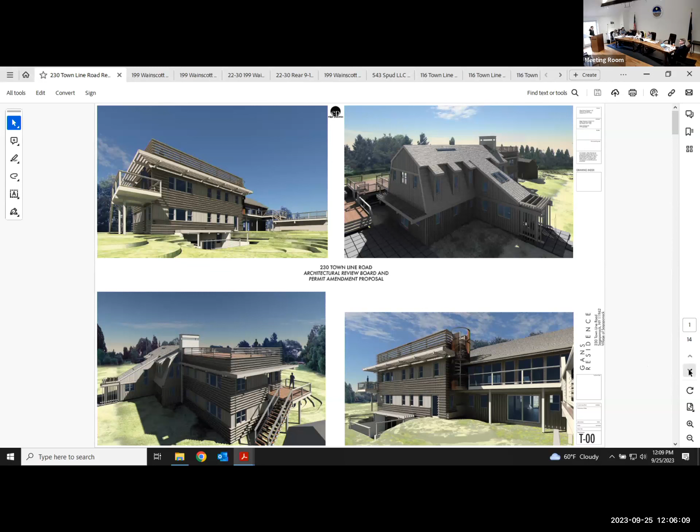So I recommended that we also demolish that roof stair that's very visible on the south side of the house and replace it with a much smaller spiral stair that's clad in wood, mahogany slats to match the existing decks.

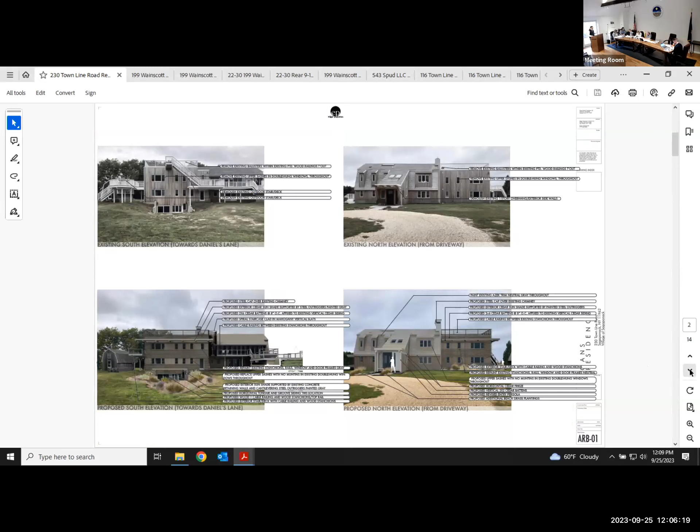And the proposal involves replacing all the upper window sashes of the installed double hung windows with ones that don't have muntins, to lend a more modern look to go with the overall kind of aesthetic. And we've already been talking about the railings.

Right now, there's all these wood balusters everywhere, and so we're proposing to take all those out and replace that with cable rail between the existing stanchions, posts.

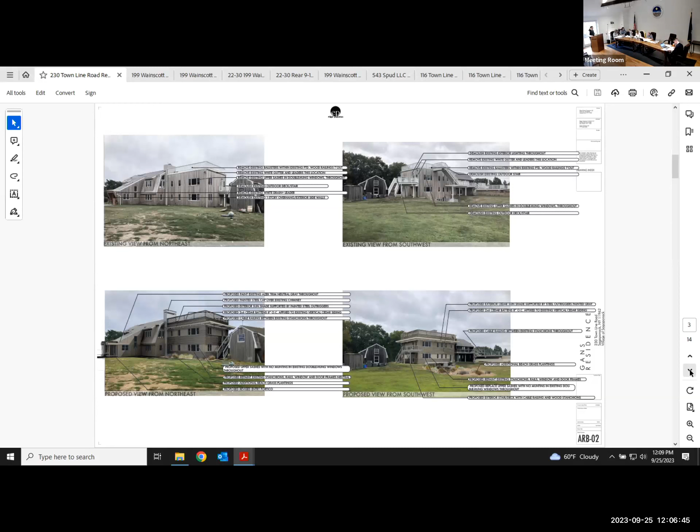The other aspect of it is to repaint all the existing trim to something more neutral, a gray color. Everything is white currently. We're trying to match the weathered cedar appearance to give it a more unified aesthetic.

And then the last piece of the proposal is to rethink the front entryway and make it a little more fitting to the house by taking out the existing overhang, replacing the slatted entry pergola, and putting in a larger pivot door with a glass side light and a built-in bench.

Overhanging slatted frame, you're referring to what we see in the bottom right-hand corner, is that correct? The front entryway, yes, that rendering is ARB-05, the bottom right image.

ARB-01, right? I'm sorry. ARB-01, well, yes, that's a similar view. I'm not sure we have ARB-05 in this packet. Oh, you don't have 05? No, I'm sorry.

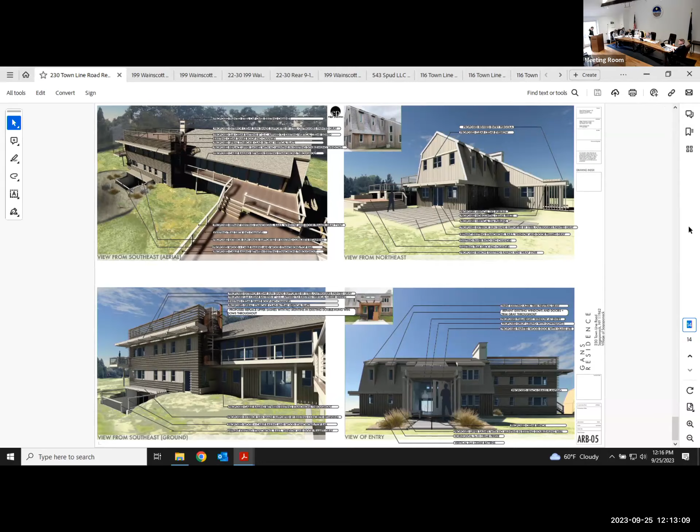Is there any landscaping planned other than what we see? The idea was, in front of the basement egress, to plant beach grasses as seen in the renderings, as well as on the other side of the addition at the base. To see that, look at ARB-01, the lower left-hand corner, and the lower right-hand corner for the plantings in the front as well.

Are there any plans for the driveway? The driveway as existing will remain, if that's acceptable - it's a circular drive. How much do we have to say about driveways? Nothing really.

Did you have anything else to comment upon? Not necessarily. I've taken both of your comments about the railing at the top and then the gray paint appearing too light in the renderings. But that's all I had.

And the plans for the fireplace, what it was to what you're doing now? There's an existing chimney that is currently stuccoed and painted, and we would paint that to match the other paint, as well as put a steel cap on it. It doesn't currently have a cap. And that would all be painted the same.

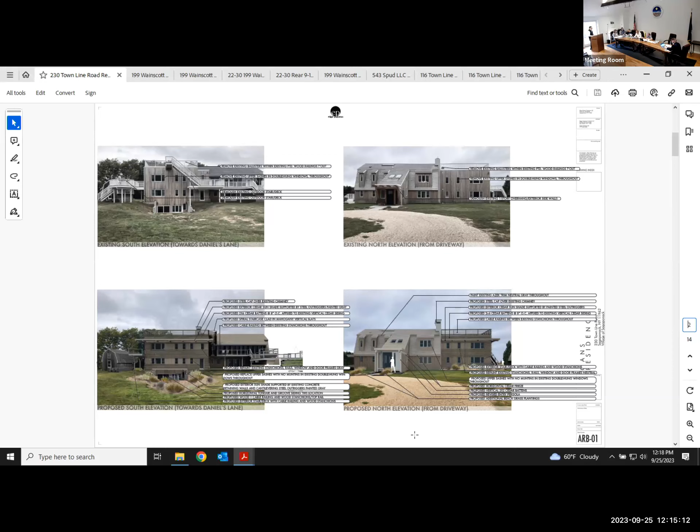Lighting, outdoor lighting for the house - I see 2 lights on the whole house, but I don't see any proposed lighting on the entryway. On ARB-03, there's a light fixture in the lower right-hand corner that we're proposing, just very small, minimal LED downlighting for entryways to code. Nothing as large and dark as the ones that are attached right now.

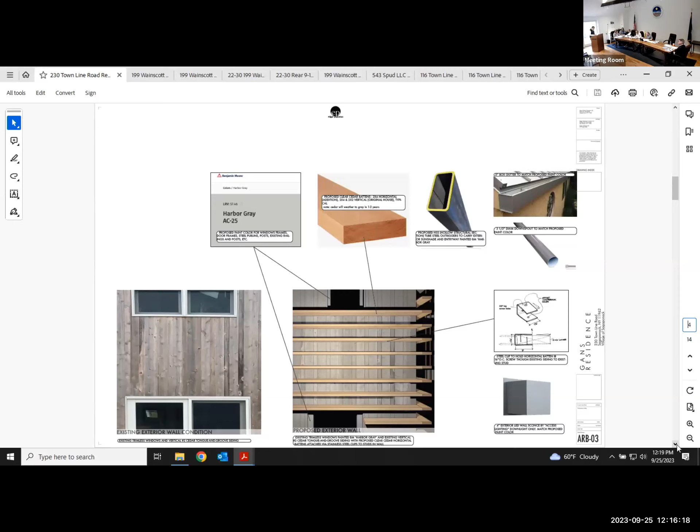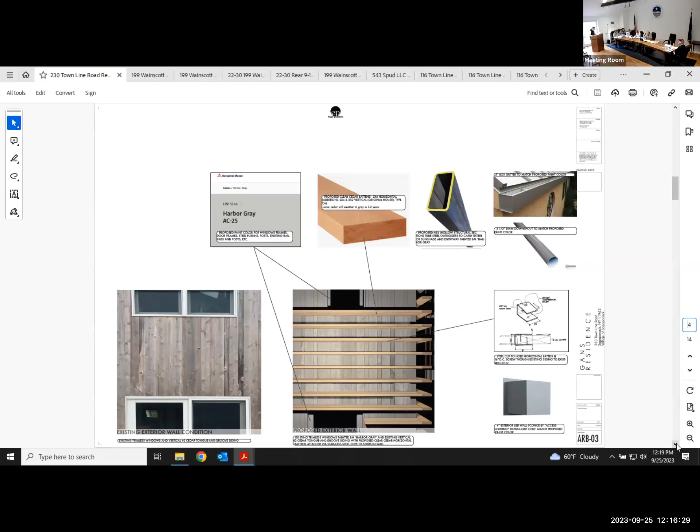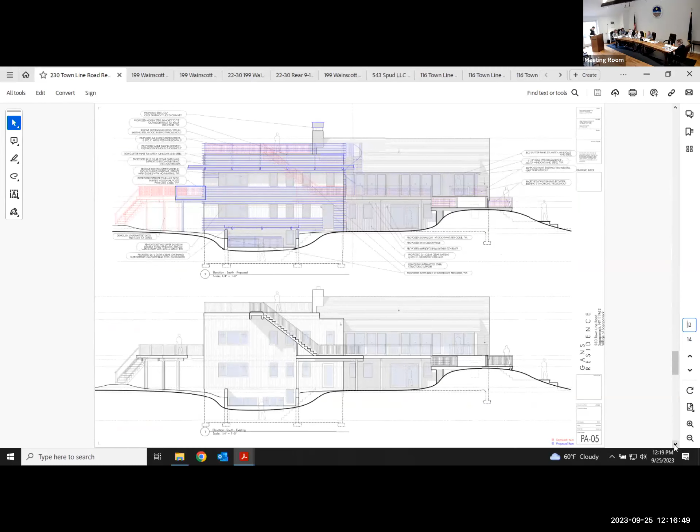Also PA06, we propose to remove the existing lighting that's there right now. The difference in height on these and PA06 is because - the proposed lighting, there's one right over the door and then on the top right, there's one way up high.

Oh yeah, well that's what's there right now. I think the owner placed those there as sort of area lights. I'm not really sure what the purpose of those are. You see in the existing drawing, they're in both those locations. So kind of put them back where they were. But if we don't need those extra ones on the corners of the building, maybe we can take those out.

How much lighting do you need out there? Is it lighting a stairway or something? I think they're just meant to light the ground for occasional use. Okay, I don't know if we want to light anything, we don't have to light for safety. Yes, so maybe if they don't have a purpose, let's take them out. Sure.

And they are not light emitting or passive shade around the fixture, is that correct? It's just purely a downlight. It's essentially a box that just points downward. So maybe, can we turn to the light emissions page? Sure. ARB04. Oh, it's ARB04.

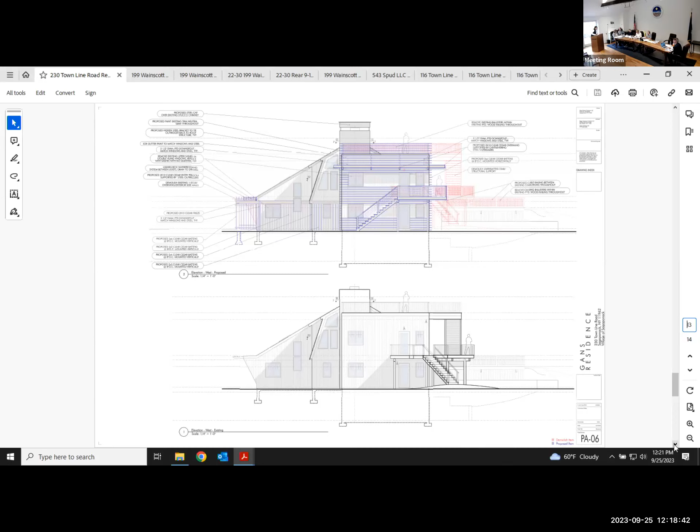A lot of windows. It's almost a full entire 2 or 3 rooms that have all wall. Is that approved of the job? Might be more. Have you increased the number of windows in the addition from what was approved? It's hard to say. I think it's roughly equivalent, but I have to check what was approved originally to give you an answer.

Okay, I would definitely want to know that, because I would think it's a lot less. Is the property or the dwelling deeply recessed in the property, or is it down a flag lot? What's our orientation? It's a corner lot, Town Line Road and Caroline and Daniels. Is it screened by vegetation? Yes, there's a fairly thick screen of trees and landscape plants on Daniels.

Because for the boards, just for board identification, our guiding principles in the code for the ARB when it comes to lighting is: will there be light extrusion that would bother neighbors, or would it affect a public right of way? Would it cause motorists to be distracted or blinded? So that's something we should always take into account when we're looking at lighting - what are the externalities?

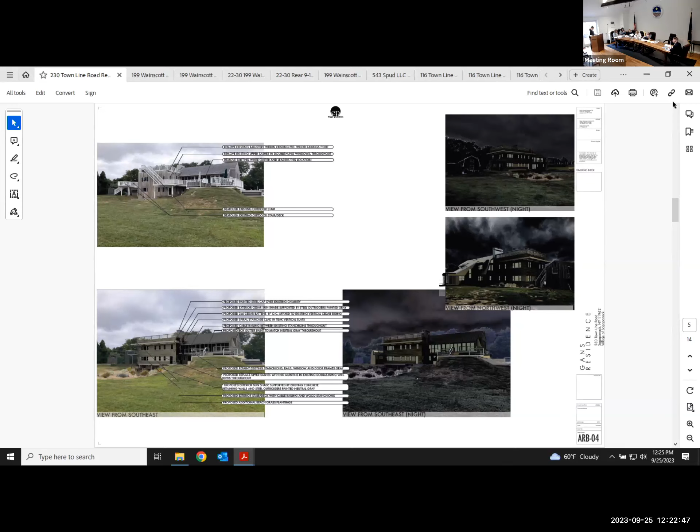The calculations on the next page are showing the actual glazing percentage on each facade of the building, PA-000.

So I just don't see if there's any difference. Right, so you're saying there's less windows. Yeah, this is what was built. It's just that the staircase and the railing covers up some of this.

This is what you were concerned about. This is what existed before. This is the red part. This is existing construction.

But your calculations, is there any way to see the drawing, the original drawings? This house existed before our village, but I remember that we approved something before, probably when I was on the board. That drawing, this co-drawing, I would like to see versus what was built here. Can you move it?

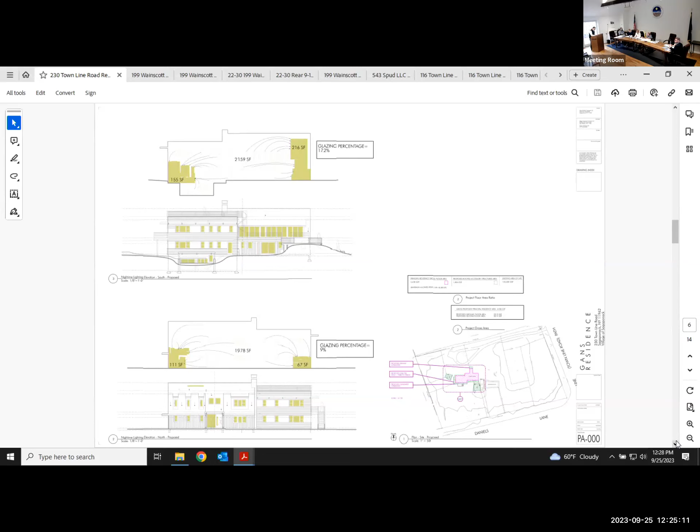So if you can bring this in back, right? Sure, yeah, absolutely. I mean, I think the focus, and then the top railing. Maybe there's a way to make it more diminutive, just give us a good rendering of what that would be with just the cable, not the additional. Sure, that's just so that it minimizes that punch on the top, which almost becomes more structured.

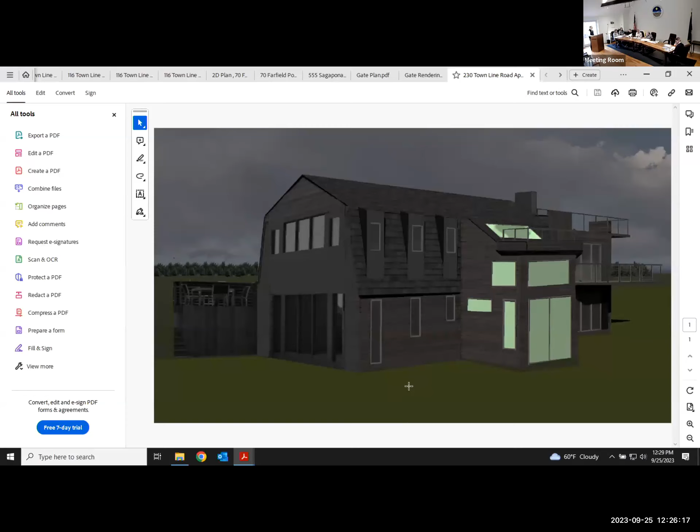All right, so this was the addition that was approved. No, this is the actual original house. And the addition is to the right, past the tower. This is the entrance, the old entrance.

These are the drawings that they include. Right, they are, they are not. This is not, this came from somewhere else. This was at one time presented, but this was not what was approved. This is what's listed in our folder. I have a print here, these are Nick Martin's drawings.

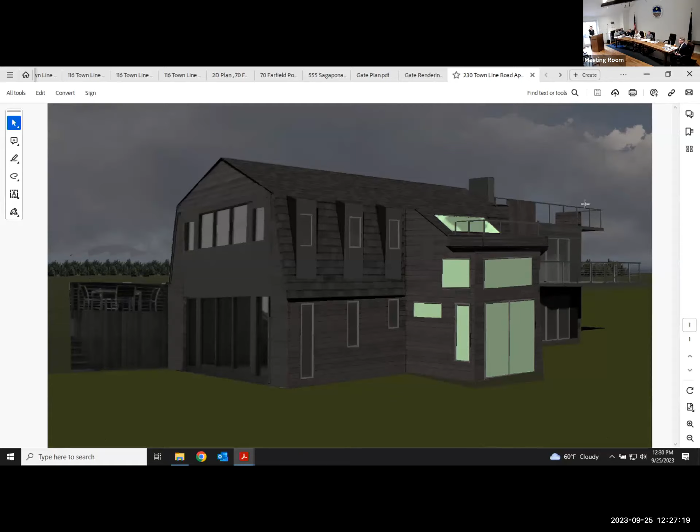From 2018, I don't know if that's right, but that was not what I already had. That wasn't it? I could send it, yeah, please. I have the drawings that were approved, and I also have a set of drawings that compare the approved drawing to what's existing, which was presented to the board, and the board said come back.

Okay, you can send those to, what's the email we should send it to? Sagaponack, no, Sag, Info Village at sagaponackvillage.org. No, what's the one for this? Gmail, it's a Gmail.

Those are Nick's drawings, right? Pardon me? Those are Nick's drawings, right? Yes, and that was approved. Was approved, right? I believe, yes, yeah. Approved.

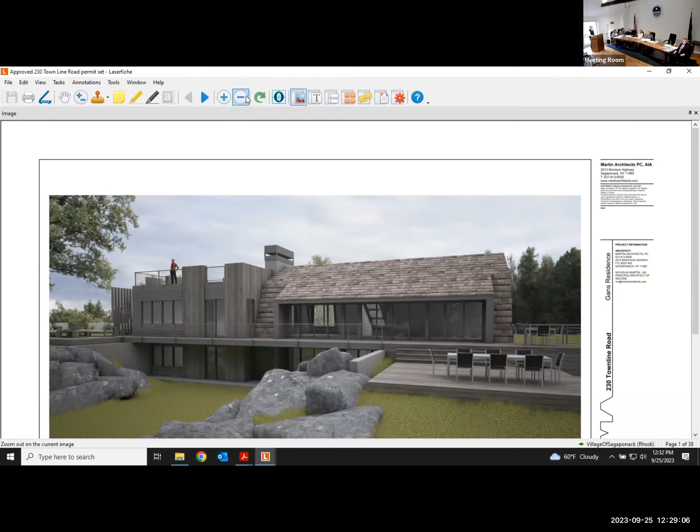Are there other pages to it?

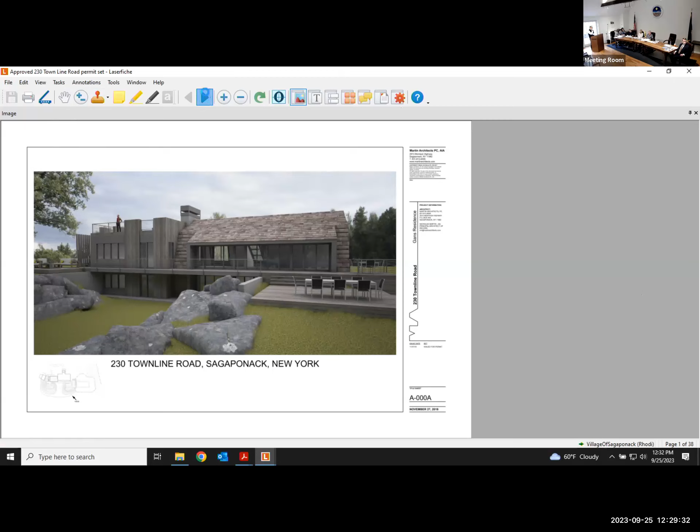And I just sent it to your email address. Not mine, it won't go to this. Oh, so it should go where? I gotta ask the clerk, I'm not sure. I think our internet might be down. That was probably not here, on my phone.

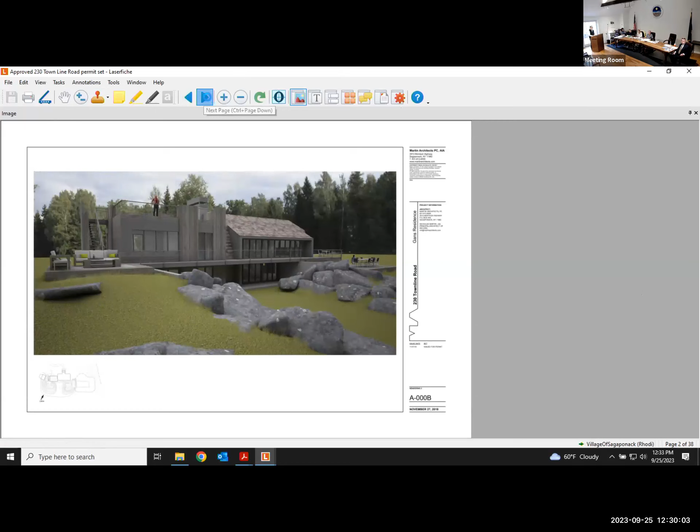So just so I have this clear, that was approved, and this is what was built. So this-

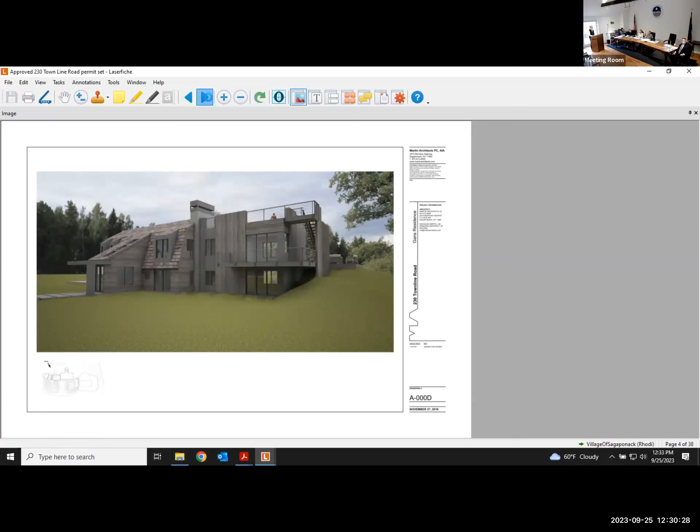At this point, I think just collecting what I've asked you for, getting that done. We'll get these out to the board, the new board members, and we can continue dialogue next month. Do you have any other questions as far as any concerns?

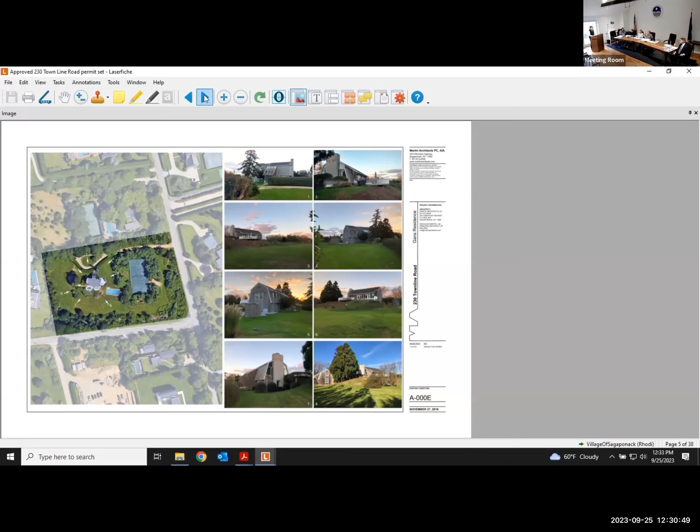If that's what was approved, why isn't, I mean, I know that all of this was done, but why isn't it going back to what was approved? Well, there's nothing to preclude them from coming back, or us treating it as a fresh application. If there's water under the bridge, so be it. The applicant would like to come back to us with reimagined, redesigned plans. We should review it as such, as a new application.

I think based on the discussion, John, this was probably before, this was when Chris was here.

We had moved forward with this, and then we were trying to rescope and reimagine it a little bit, less of the decking and the visual impact of that, all white metalwork, etc. So that was where the board at the time was coming from when we looked at this as a discussion item.

Let us take some time to digest this a little bit, I think. And you'll need to understand that several members of the board have changed since that discussion.

Yes, Mr. Gans. I just wanted to say what might be helpful is to read the board's comments from after we went back and discussed what had been built. The board gave, I think, direct and thoughtful response to what irritated them so much about the changes that occurred.

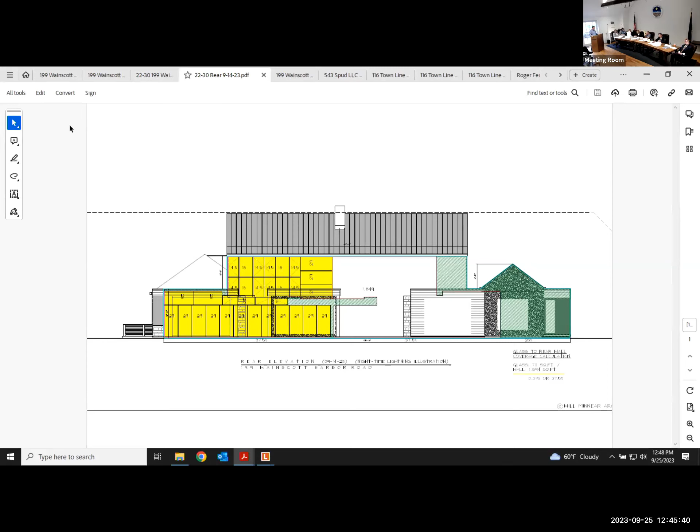If we go back to the actual architectural set, you'll see that the first floor of this house is larger than the second floor, and most of that glazing is at the first floor. There's no sliding doors or terraces on the second floor, just bedroom windows. There's still the front elevation right there. I want to see the back. Yeah, so you'll see the majority of that area, I don't have the exact percentage, is across the first floor of the house, which is much larger than the second.

And the height of the first floor windows on the back, the head height of the windows on the second floor versus first floor, first floor they're 9 feet, 10-foot ceilings, 9 foot.

And that's universal across the first floor. Correct, yes.

Okay, this is completely clear on the back. Is that presently all this? That's where my tennis court is going, that's my lot. That's your lot, the existing structure that you've kept? Yes, and that's outside of the current setbacks.

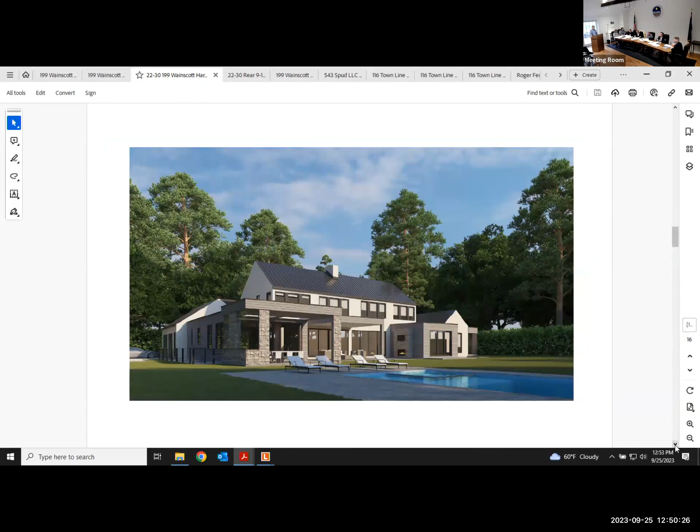And just curious, is this a house for sale or is it? No, no, everybody asks me that. I am a builder, but I promise you, I want to live in Sagaponack in this house. I don't wanna say it's my dream house, but I designed it with myself 100% in mind. I have a master bedroom on the first floor, which a lot of people have pushed back about, saying I should have had one on the second floor. This is truly a residence for me based on my years of experience and what I want to live in. I'm not that young, so let's say the rest of my life, hopefully.

The concept of the landscaping too, you'll see it's not like the rendering, it's not a wide open, clear lot. It's very vegetated, very gardens, very ornate, not a lot of grass. So the rendering is sort of an artist's representation of the house, that's really what we're showing. It's the house in context, it's not actually depicting the landscaping. I want less lawn, less grass cutting.

So if you'd like, I can walk you through the house again. Sure, yeah, great. I think the renderings were digital form last time. The site plan, we'll start with the, maybe go back to the very beginning. Just walk through the whole presentation. Yeah, so first page, next page is the site plan.

The tennis court on the north end of the property there is already permitted. I believe it has been cleared to start construction on the tennis court. We decided to put the house on the south end of the lot, with the majority of living spaces facing the main part of the yard, which is north. That just happens to be the side, it's not opposite the street, if you will. That's the north side of the house.

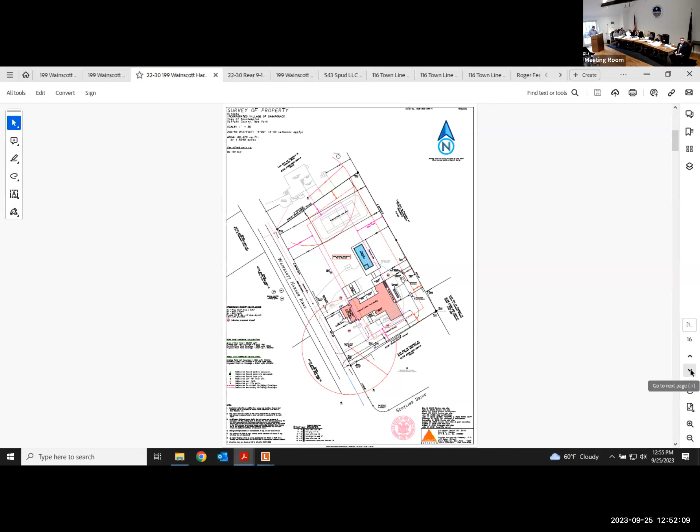The next two shots are aerials, just to put in context the location. You'll see to the northeast is reserve land, wooded areas. There's a house north, south, and a house to the west.

First page is, next page is the rendering. So the concept, again, materials - warm stone was an important element in this project. The gabled elements are stuccoed, very intentional, with metal roofs, standing seam metal roofs, not significant fascias, overhangs, just a clean square out of there. The flat elements, which there are some - there's no second floor terraces on the house, but there are some flat roof elements - those were a warmer material, meaning wood, brownish tones, in this case we have proposed trespa, which you have samples of in the folder there, as opposed to wood, which trespa has no weathering, no staining, no color change to it, it'll stay like it is from the day it's put up. Again, stone, I know was discussed, but stone is a very important element to the house.

We are proposing solar panels on the roof, not required by code, but that is intentional to have solar on the roof. That's south facing.

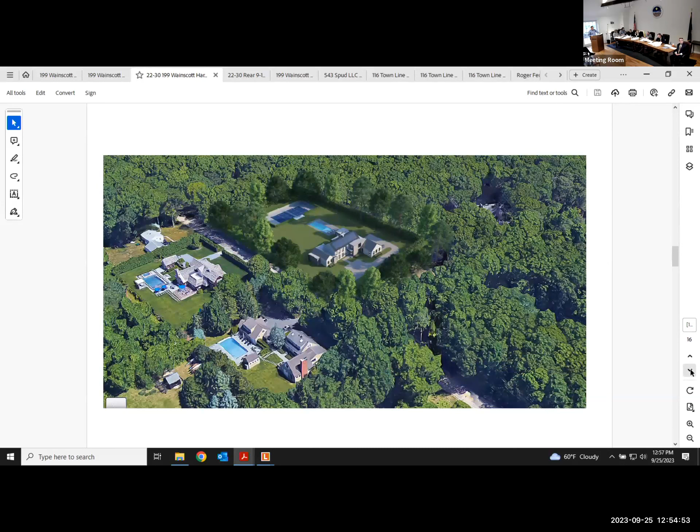Next page is an aerial shot, bringing context with the neighbors. Next one's the same. Let me get into some illustrations of what it would look like lit at night.

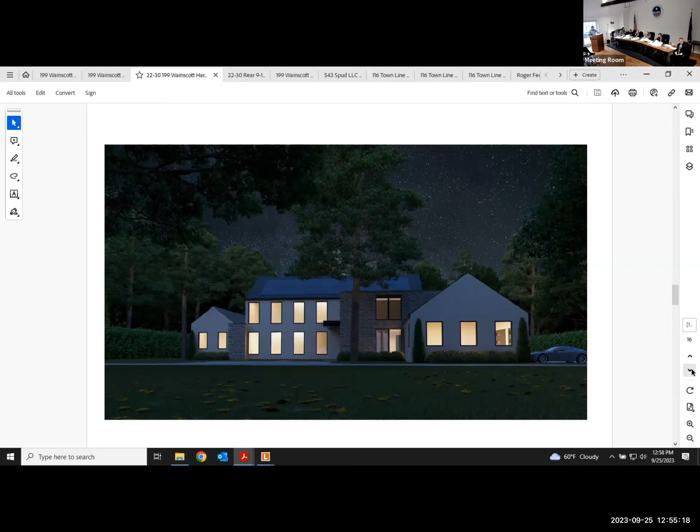Next illustration is a straight on rear view, to show you the illumination. I know it looks like the trees are upright and everything - that's just how it prints.

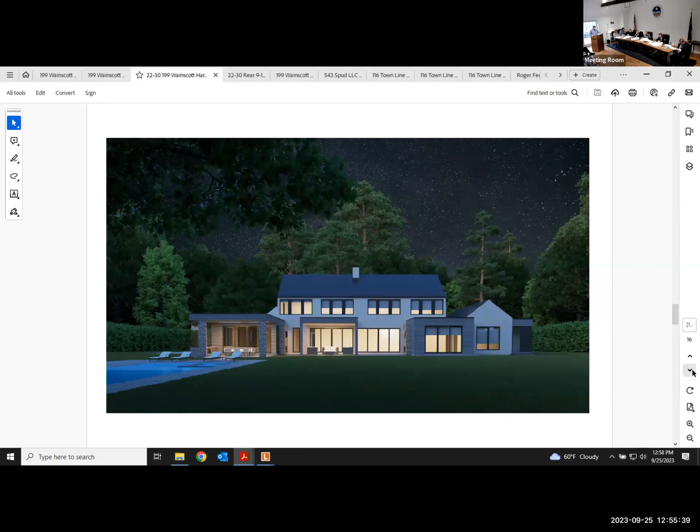So in the next page it illustrates the material specifications and where they're called out from. These are actual images of the actual color, as close as we can get when we print it - you'll see the earthy tones, browns, grays, beige.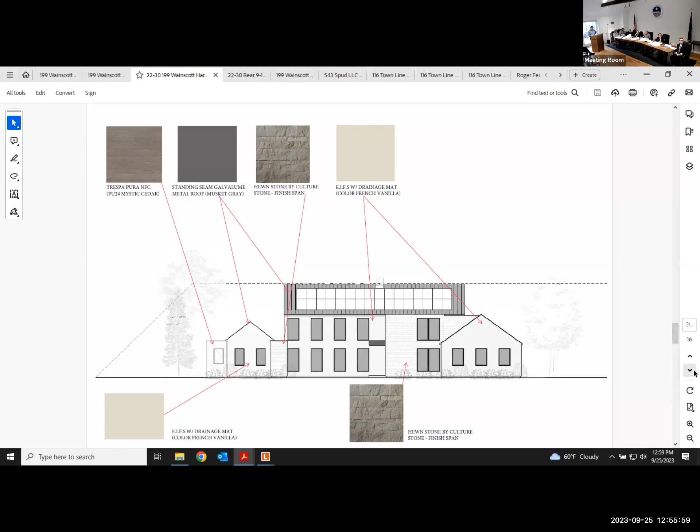And then we have the light analysis of the elevations and the percentages on there, and then I had working drawings with dimensions. Questions on this?

Mr. Burns has provided a solar panel with some other samples if you want to see them. Yeah, I actually brought a full solar panel and a piece of the siding material that replicates the wood, and the stone sample - they were in there.

The solar panel's 4 by 6, but I would have imagined you all would have at least taken a look at it. I could go get the smaller pieces if you need them for any reason. Yeah, I'd say bring them in and have them on the cameras for. They're in the back. Yes. Yeah, I agree.

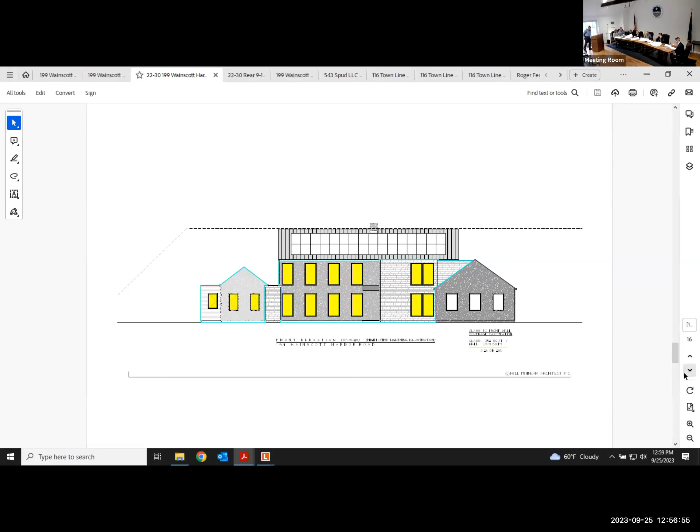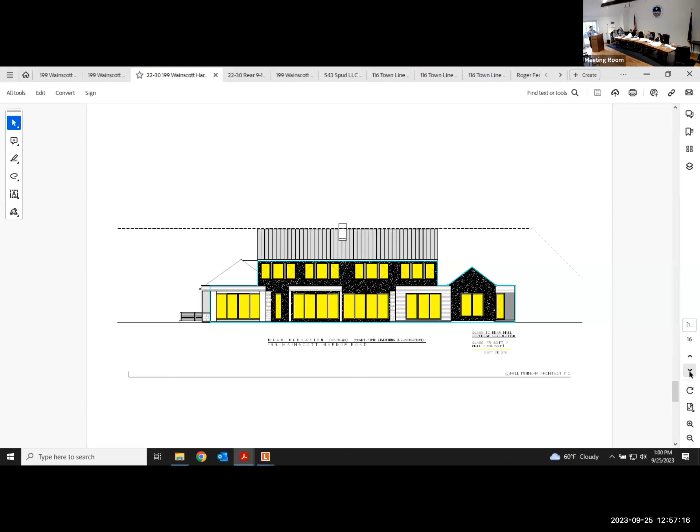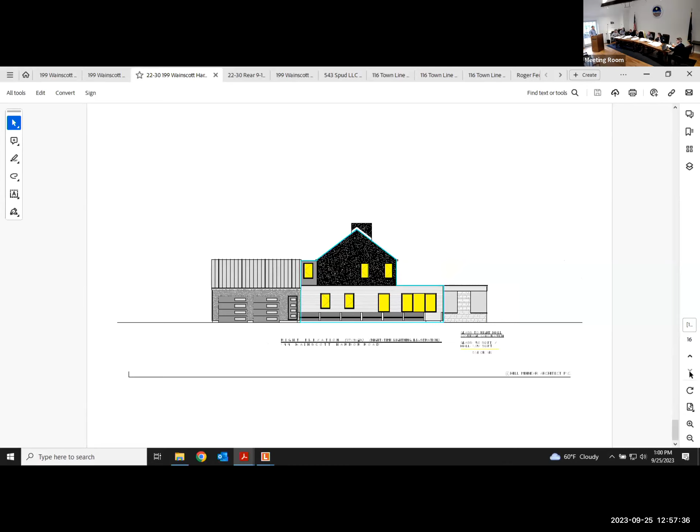Here's the Trespa. What would be better if it was over here, because it's not going to be on camera. No problem, I think we're just - I can do that too.

Piece of metal. That's the metal, color of the metal.

This is the final finish of the - that's the stucco finish. And that is the connecting piece between the stone and the wood elements and the roof.

Is this the final color or texture finish? I would say that is the color that I picked. I didn't want a bright white, I wanted a soft beige. There is some flexibility, but I was hoping to use that to keep it very neutral.

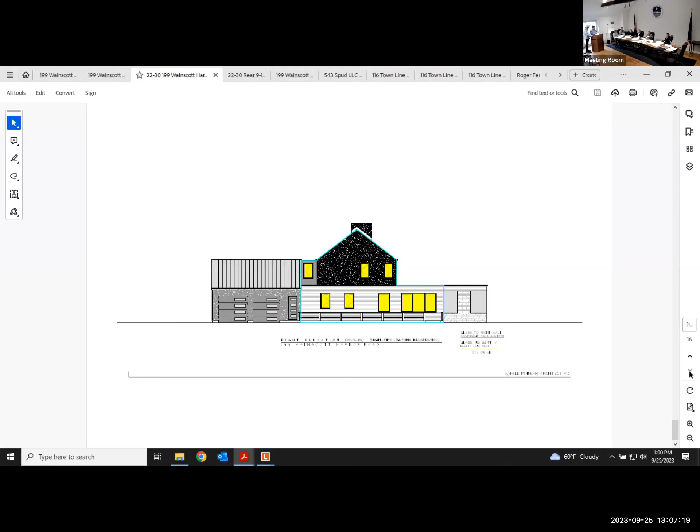I think the idea was to connect them to a point that they feel vertically connected, like these slices - this is circulation on the second floor. We could definitely bring the sills up, easily, no problem. I'm a modernist as well, but I have a great legacy and interest in historic structures, and I feel like if we consider the scale of it and the foreshortening aspect of the second floor, it might lend itself to being more of an in-scale residence, less commercial.

How's that south and north elevation? The south particularly - I think the north actually has, because the doors are so tall, quite a bit of... I think it's calling it here, but it's the north. There's quite a bit - it looks like 70 to 80% of that elevation on the first floor is glass.

Well, there are 10 nine-foot ceilings with nine-foot doors. Right, head height is not... but if we looked at the quantity, those are 9 by, let's call it 3.5 - so counting 1 through 15, that's 15 of those units plus an additional 4 other units. That's probably about 80% or 85% glass facade on the first floor.

Just making everyone aware, we could lower the head height on them, probably to 8 foot, which would give it a little bit more. Well, that's up to you - I want to accommodate, I don't want to push back on your architecture, but it just seems like it's a very large percentage on that elevation.

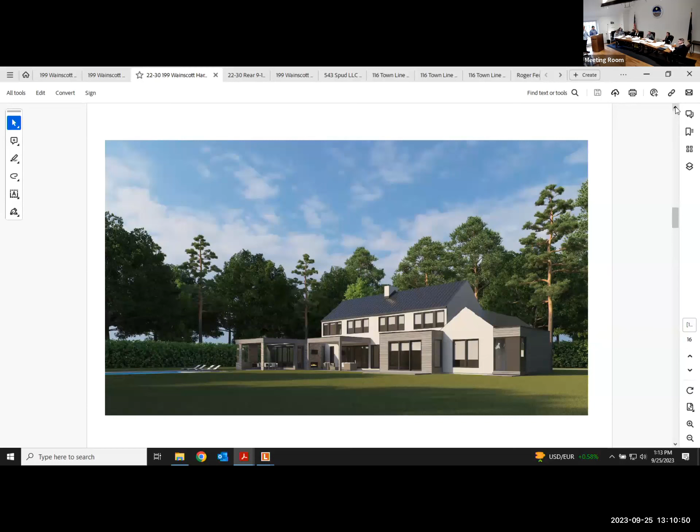It's a lot of reflectivity - that's the north elevation, right? And then in the south, I don't know what the count is, it's rather high for glass. So it's just, you know, life is a balance. I think we're trying to ask for some temperance on these elements.

Well, I laid it out so that it doesn't face the street at all, and I recessed it. And that's the optimum location for it, according to the solar guy I spoke to. I agree with you, I think that sounds fine.

Appreciate it. Also, when you say facing the street, people are just mostly driving by, right? Right, so we're also getting 45-degree angles at it. It's not just standing in your front drive looking at it this way, you're seeing it this way from the street also. Yeah, you do have a neighbor there.

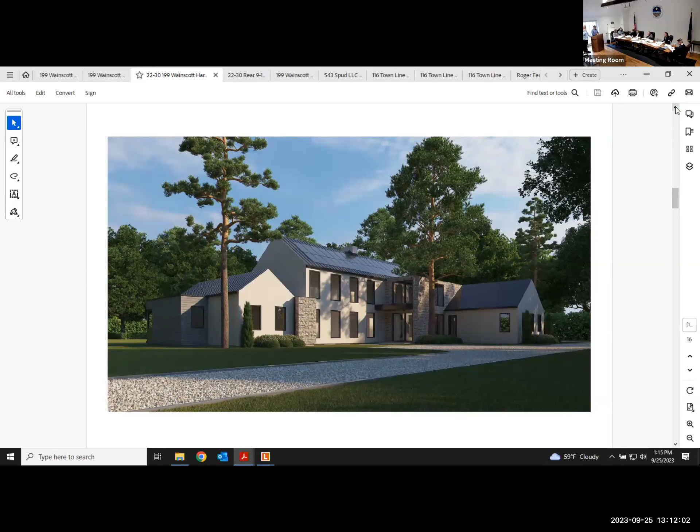Overall the design's really nice. Is there a more flat option? There's one flat section over the entryway. No, but I mean is this added—

Galvalume, it's zinc coated. So is this a matte finish? Yes.

Okay, we will clearly come back with the specific items to be addressed. What I'd like to do is, for clarity, we're gonna reduce the glass on the front. I'm gonna work on adding much more of the Trespa element on the body of the building to reduce the stucco, and I guess those are the two.

If I do come back with a modified stone, what I'd like to do is possibly give a potential alternative. I appreciate that you like this and I do like it, but if I come back with something to further soften the look of it, I would like that possibly to be considered so that it blends with the Trespa element as well. Are those your options there?

Yeah, I picked a bunch, I just went through some catalogs, and I don't want these to be written in stone. But I thought something softer like that, or something with a little more texture, to feel less—trying to bring it in. I live in Sagaponack, I want it to blend, but I also want to continue the kind of modern idea.

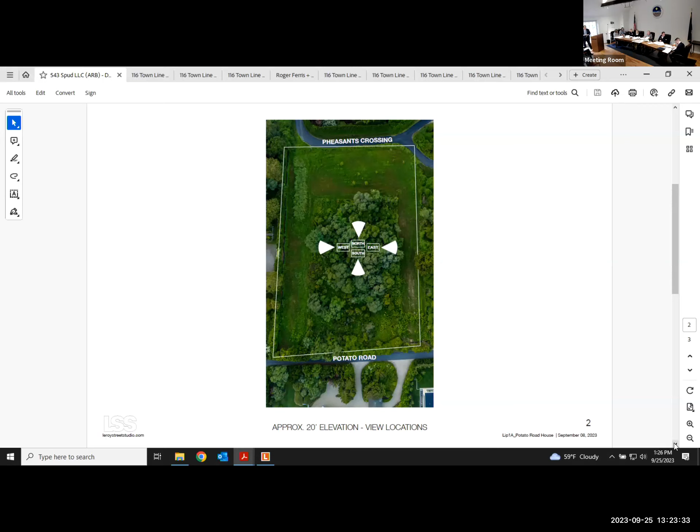I can hear none of it.

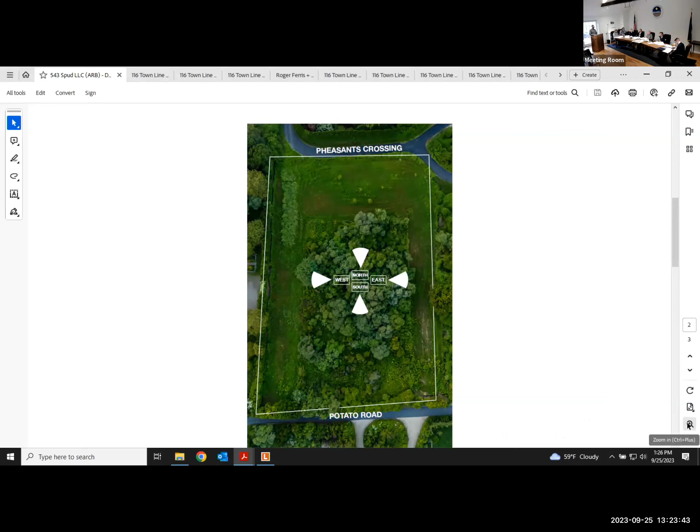Back again, John said. If you could just go to the next slide, you can see the four views in the four different cardinal directions. The one on the top left is looking north across Pheasant's Crossing towards the neighbor. The one on the right looks directly south at the neighbor across Potato Road. The one on the bottom left is to the east, and the one on the bottom right is looking towards the west, for 20 feet.

These were taken at the height of the second floor, which I believe is 18.6... 18.6. I think it's listed on the...

If I may, just interjecting, 18'6", and these are not constructs consistent with the landscaping plan, these are the existing conditions. And correct me if I'm wrong, you'd be a 7-foot person to see, because they're actually taking the photo a little higher up in the house.

Thank you. Any other questions on anything else? That's what we're here for.

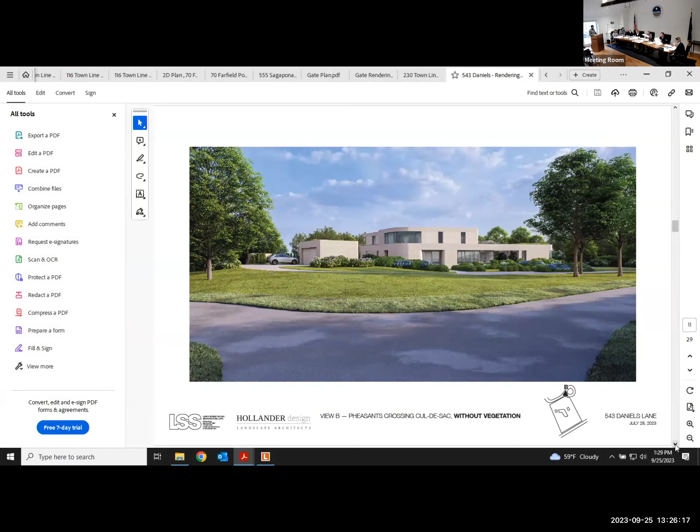Just curious if you have any renderings to show us? Yes, they were included in the last presentation. Oh, you were at the last presentation, yes. I believe there are pages 6 onwards. Do we want to go over our comments from last week?

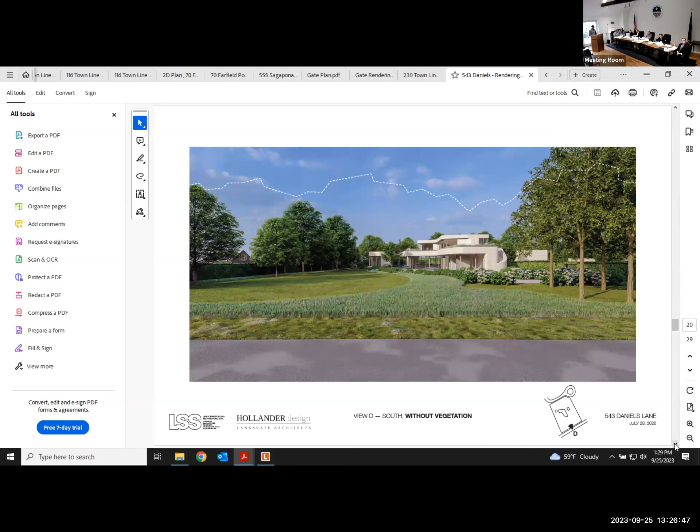Keep in mind that some of the perspectives you are seeing do not include the plans for existing edge of property plantings and so forth. Those are depicted with the lines in them, and that would be what the proposed vegetation would be blocking. So although this is an idea of what the light emission would be, the line indicates how much would be covered by the proposed plantings along with the existing plantings, the existing hedgerow, which is here. And the hedgerow is going to stay, correct, it's not on our property.

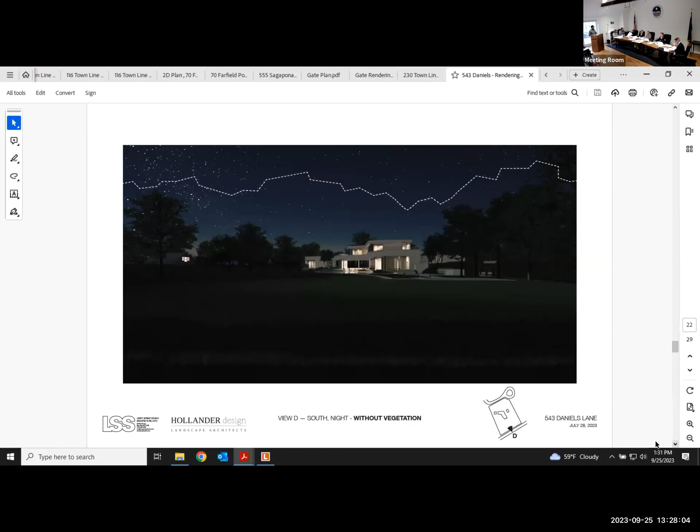The material in the summertime is not the same in the wintertime. It's pretty stable, like 10 months. And this is also, until it's not, right, until the month where... Melissa, since you're on the call, can speak to the exact composition of the hedge. Actually, if we can put it on the landscape plan too, that might also show how it looks. But just for the record, there's certainly months where you can see right through in any area.

Privet is only... no, understood, I'm trying to get at the landscape, and what we did is we stripped out most of the vegetation so you could see only the architecture. Melissa, you want to go over that with the landscape?

Yeah, I'm having a hard time hearing exactly what the question is, but is it about the existing material or vegetation along that southern property line? There's some discussion about what it looks like in the winter. Yeah, so it is a fairly densely vegetated existing condition there, and while the majority of it is a combination of privet, there are some cedars mixed in. The majority of it is deciduous, but it is so thick and dense that it does provide quite a bit of screening even in winter months.

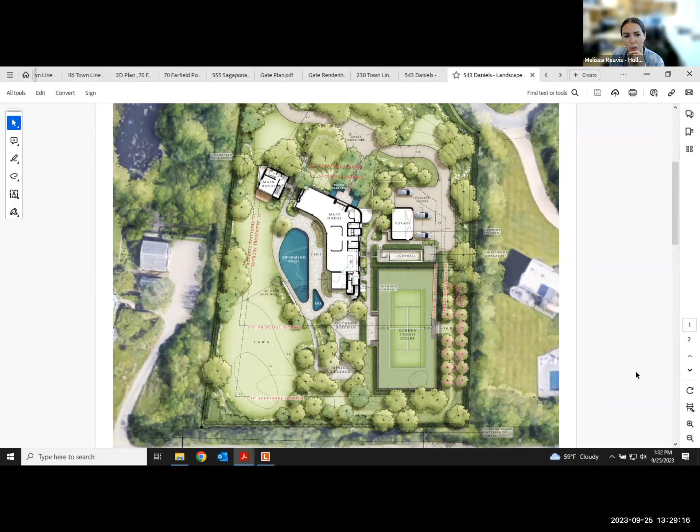And then, of course, on our side of that line, we are putting in a lot of additional planting. We have kind of a mixed hedgerow of viburnum, some additional privet, and then a lot of trees going in as well. So it'll be a pretty dense mix, even if the majority of it is not evergreen. When we showed the renderings, we turned off that layer and just showed the house, so you can see the distance. So all these trees in the bottom are not shown on that, between the privet and the house.

I just want to bring up the fact that in the last application, we commented that it was more stone and stucco and not a lot of wood or wood-similar materials. I did not say this the last time, and I felt like I should have, so I'm going to say it now, which is that although I love this, I love the limestone, I love the texture, and I love the straight paneling stone, and I love the large amount of concrete between the stones, so that's why I was hesitant to say anything, but there is no wood on here at all, and I'm just going to throw it out there to the board.

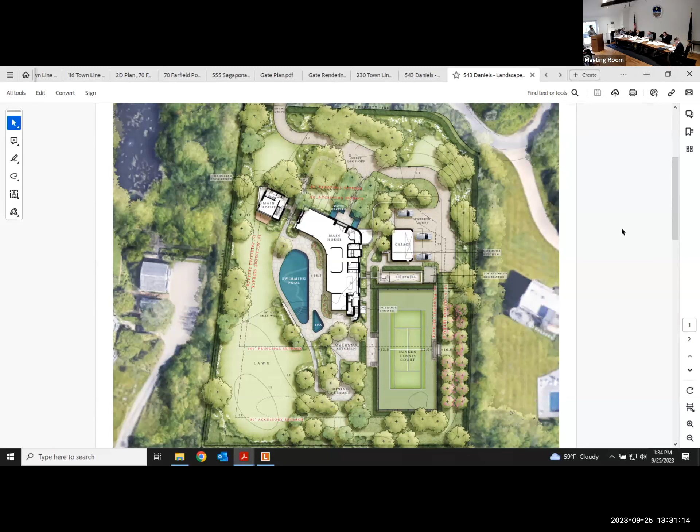So it's something we've thought about quite a lot, and there are two kind of points for us that were points of inspiration. One is, of course, we discussed last time that the local context was a direct inspiration. Then also we looked at, there are two kind of interesting things...

One is that the geological event that most affected the land surface of Long Island is this advance of a massive ice sheet, a glacier, which deposited the stone moraine of fieldstone all through this area. So that's one interesting thing.

But the other thing we thought was really interesting and relevant is that local farmers often stacked up these stones, whether pulling them out of their fields, to define the borders of their properties and fields. So in that sense, I totally agree that the last couple of centuries has typically seen wooden construction. We're not trying to do that, but we are drawing inspiration heavily from the context.

I very much appreciate the new perspective, and the thoughtfulness behind it.

There's another issue, which is that our clients wanted a lower maintenance house, and this is right on the beach, and wood requires a huge amount of maintenance to upkeep. But the interiors of the house are very richly clad in wood. So what you're not getting in these images, because we hadn't established our ceiling materials at the time, is there'll be a very warm glow from the wood ceilings and wood materials of the interior of this house.

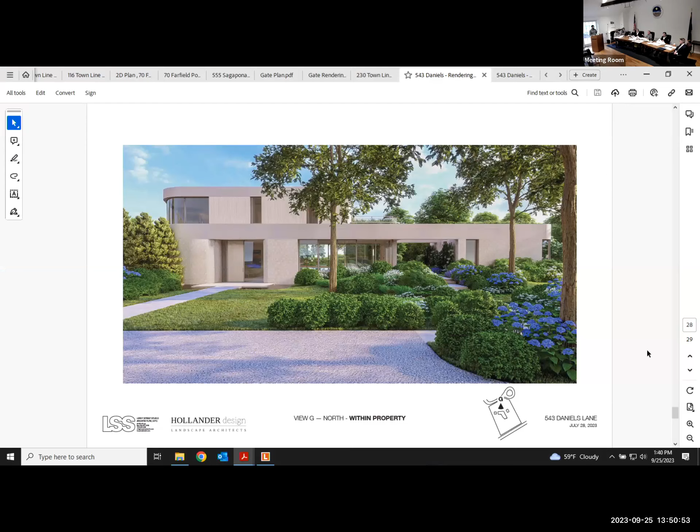Nick was not here last month and did not have an opportunity to lend his architectural concepts to it, and we also discussed that we had not applied some of the observations on materials to yours, following the next application we reviewed last month. So we're just kind of rehashing some of those thoughts back and forth. I think if you give some credence to thinking about some options with that, we can digest it a little further, but at the moment you might not have a strong vote for approval. So let us digest it and see if you can come up with some coordinating of concepts - materials, correct?

Very good, that's very fair, and I do want to add one thing I've been saying to boards - I'll be candid with you - with the exception of certain boards in the Village of Southampton, I've been saying this to boards that I've appeared before: it's always intelligent, well thought out, with a lot of mutual respect. That means the world, because that's all a practitioner can ask for in a peer review board, and I thank each of you, and council, and staff for that.

When you're doing something so bold and beautiful and new as this, I think it just takes a little time for not only the neighborhood but the board to open their minds up a little bit. I love to break the rules, sitting on this side of the board right now. I just have to think about the greater Sagaponack vibe. I think it's very thoughtful to the landscape and the herbs, everything - I personally like it very much.

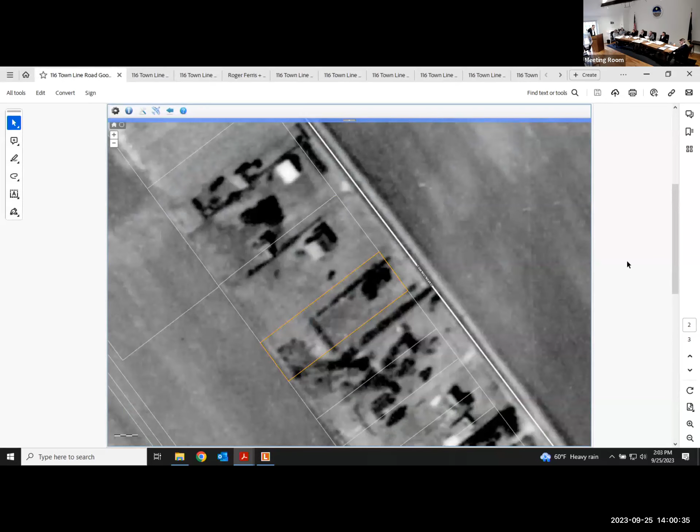There was an inquiry about the history of the house. The history is a little less certain. We know the lot was created by subdivision in 1924. An aerial photo from the Southampton GIS indicates there was no house on this property in 1930. The house appears in the next available GIS photo, from 1957. We believe the house was built prior to 1957, likely in the early 1950s, and was renovated in 1992 and again in 2016.

The oldest certificate of compliance on file with the village is for a greenhouse addition in 1992. Prior to that addition, the house measured 875 square feet. We know the greenhouse addition was subsequently framed in and shingled in 2016. Our office did that work.

Neither the deed nor the title report provide any more detail about the date of construction or the builder. It is unlikely there was an architect associated with the original design. Without original drawings or permit history, we were not able to identify the builder.

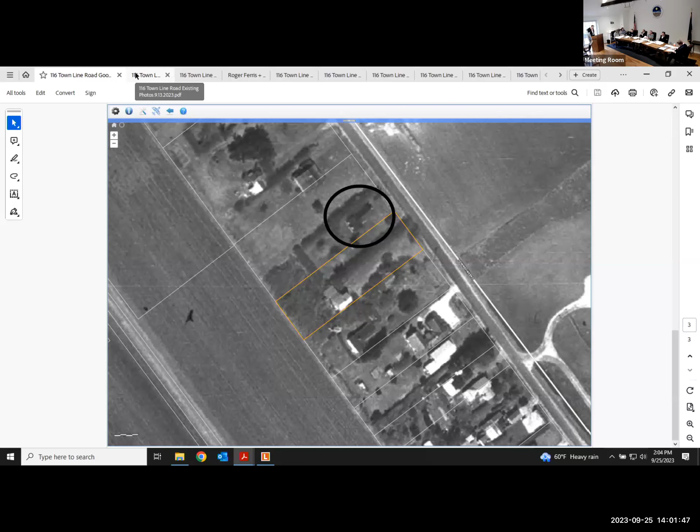As mentioned, the existing house is about 24 feet from the front property line, which means the house and the terrace behind it are located entirely in the required front yard setback. The house violates both the front and side yard setback requirements in the current pyramid rule.

Have a graphic showing that. The red area is the red box in the center of the property here. That's the buildable area with it respecting the setbacks. This is the existing house and the rear terrace.

It is not possible to add on to the house without significantly increasing the existing nonconformities. We did explore ways to add on to the house, extend the house, but all of those increase significantly the nonconformities. So we've come up with a design, an as-of-right design to build a new house within the building setbacks, compliant with the pyramid rule, and we're seeking approval for demolition of the original cottage to do that work.

I believe the original subdivision came out of the Babinski family in Sagaponack. Having spoken to the granddaughter just last week about this, it might have been Dr. Hess, if it's south of Daniels Lane. This is Town Line Road, and this is actually a double lot. This lot is 80 feet wide, the original lot's 40 feet. I think this was Hampton Home Place, the Dr. Hess. That's what it is, yes. Hampton Home Place? Yes.

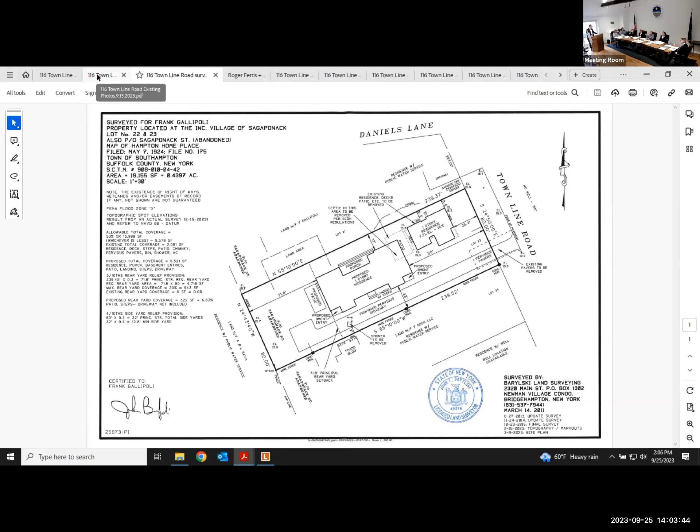So the curious thing is that it's just one of these remarkable cottages there, which is the old vernacular, the old language, and part of the charm of all of that area. One of the earliest cottages along through Sagaponack was built by my grandfather for a fellow who was associated with public television and public radio. So anyway, it's one of those particularly unique spots.

There's, if you go down through that area, there have been some major changes, and then every once in a while, there's one of these remarkable cottages that is still left. Very charming area. Because of that, this house like this. Yeah.

So part of me would like to see the existing structure realigned and somehow made into something that would be conforming, just for its simple charm. But I don't know, I understand where you're going with it, but I don't know how the rest of the board feels about such a thing.

Is there a way to see the new drawings for the next application before we decide on this? Maybe it looks exactly the same and it's just pushed back on the street. It doesn't look anything like the same. I haven't seen it. I haven't seen it. Oh, it's on the drive, but we don't, well, usually.

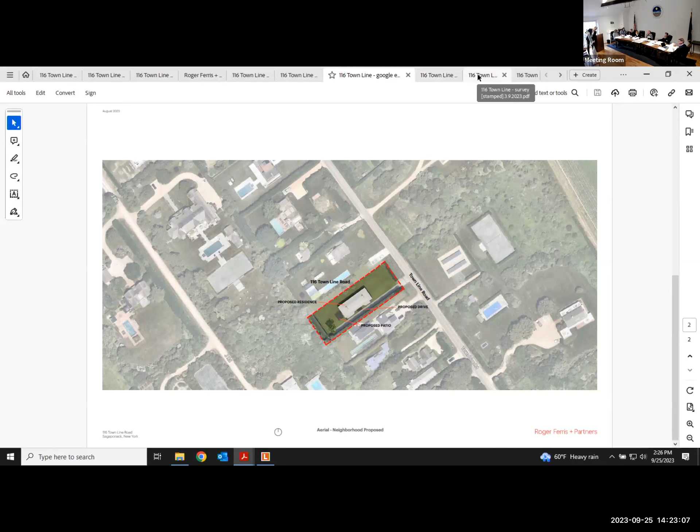These are Google aerial images. There is a new 2-story house on the adjacent property to the south, very close to the property line, 3 feet from it. There's a massive hedge on this side property line in the rear. We're proposing to pull the house back, centered in the property, with the narrow end to the street.

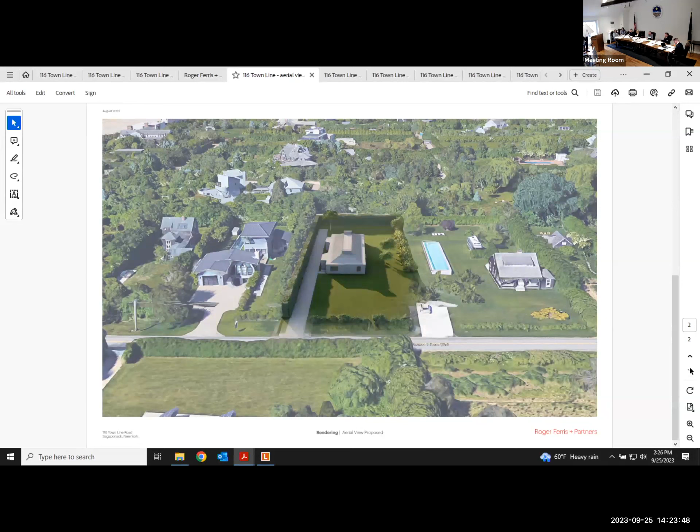So this is the view from the street. This is a 3-quarter view closer to the house. The house is rectangular in plan with 2 projecting bays and 2 covered terraces recessed into the building form.

The hipped roof, the chimneys, the walls are all clad in a light gray terracotta shingle, evoking the scale, pattern, and color of weathered gray cedar shingles characteristic of the area. All the windows are double hung, arrayed either singly or in pairs. The 3 sets of exterior doors are also wood. All doors and windows are painted a neutral weathered gray color like the shingles.

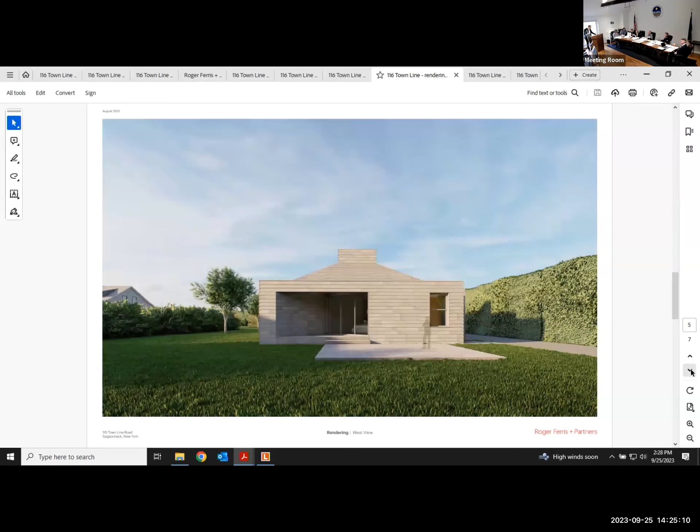We have provided calculations. So that's the northeast view, and this is the northwest view. In the package we've given you, we've provided calculations showing the percentage of surface area of glass, which is 14%. This is a much smaller house, a more traditional house than the 2 houses you just looked at. It doesn't face the ocean, doesn't face a pond, and doesn't face a large piece of property.

It has small windows punched in. Just for clarification, this particular view you're using, this parking area belongs to the neighbors. Yeah, the lot is so narrow that to get a three-quarter view, we had to look across the adjacent property. I understand, I just wanted clarification. Yes, thank you.

So the total surface area of glass on all four sides is 14% of the wall area. We've done a photometric study showing that the light projection from the exterior lights provides no light trespass to property lines. Terraces and sidewalks are neutral - we propose a neutral gray natural stone, and the driveway would be pervious crushed stone.

Is there a reason the driveway extends the entire length of the lot? Yes, because zoning doesn't allow you to have your only required parking in the front yard - you can have guest parking there, but not required parking - so the drive extends past the house so cars can be behind it or along the side. I see, and it's all the same material? Yes.

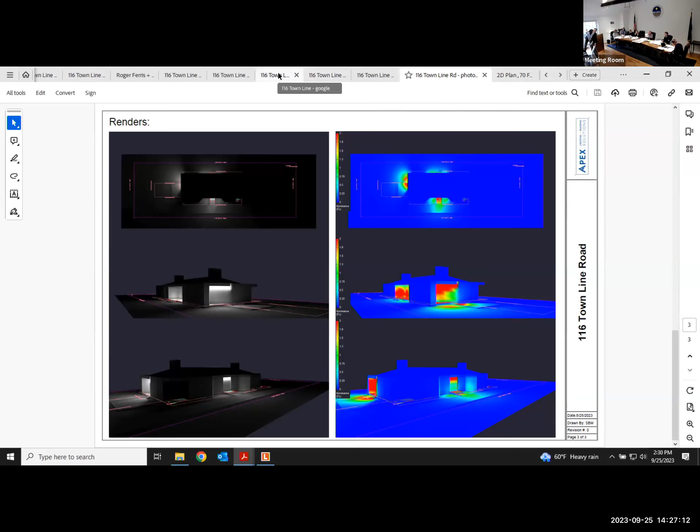The theory is like the original shingle style, where the shingle was wallpaper and covered every surface - all the roofs, the gambrel roofs, the gable ends, the walls, the indentations, eroding the main form with covered porches. So the roof, the chimney, and the walls are all clad in the same material.

Well, but rooms are on the second floor. There's no room for a second floor. I think it's a very modest, elegant building. It's not the original cottage, but it's trying to be modest and contextual, but bigger.

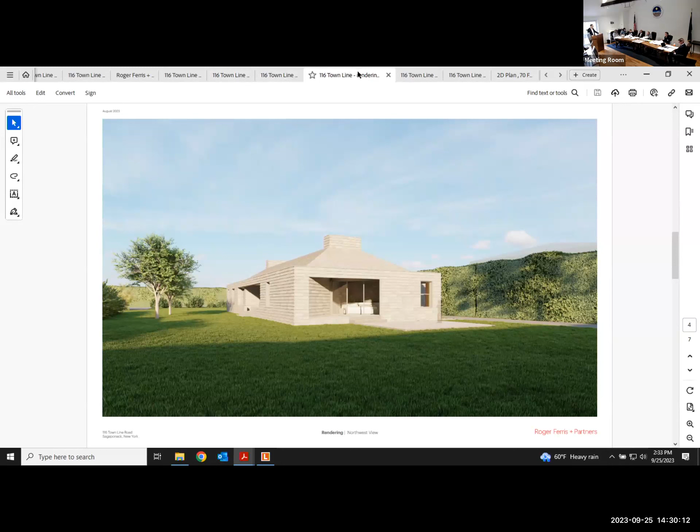Sorry, I don't feel that this house has enough interest to, or is adding anything to Sagaponack, after you're subtracting the charm of the house that is being removed.

I'm sorry, we need to make sure that we keep the applications distinct. We're going to discuss the existing dwelling as part of our review of the demo application, we need to look at this with an unjaundiced view. Understood.

I'm looking at a wall with a roof that looks like a Pizza Hut, and I really don't feel like that adds any value or charm. It looks and feels like Sagaponack.

I can see your perspective. There's not a door, there's not anything warm and welcoming about it. Well, it's all wood, that'll all go to clear cedar, which will silver. Which - is it ceramic? No, I just mean there's nothing inviting about it.

Oh, it's a one-story, small-scale structure. Yeah, and the house before it did a good job of it. But we can't compare the two.

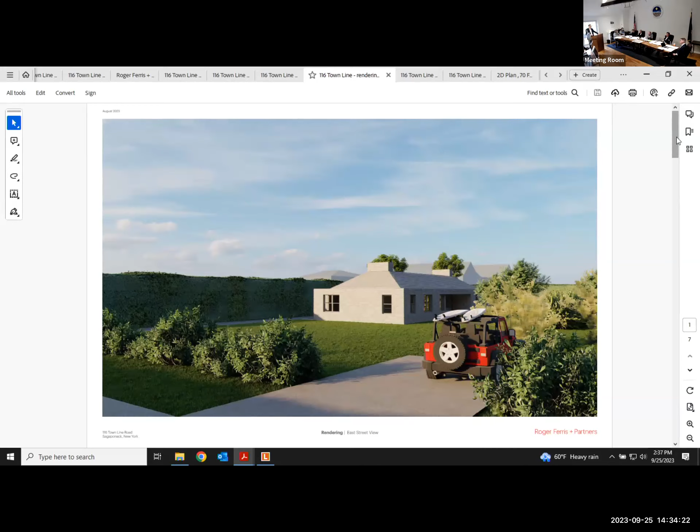And where is the turnaround at the end of the driveway here? Is there one? Don't think there is one. Okay, it looks like it's a kind of pivot style. Is this package of drawings in yours? Yes, there's a site plan, SP 100, that shows the turnaround at the back. We don't have terribly much jurisdiction over driveways. I was just curious, I see it here. Okay.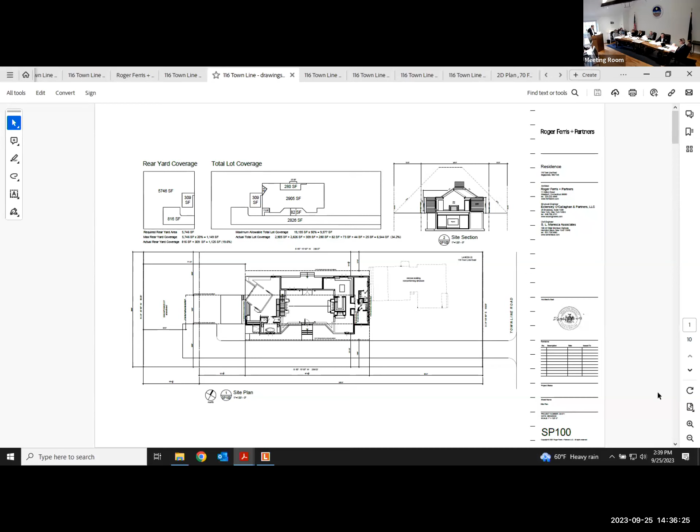They're just looking at a wall with 3 windows on it. We're showing the building, we can soften that with plantings, that's part of the grand view.

What we're supposed to see is the existing cottage, which is charming because it expresses a gable end and a chimney to the street, but it's also completely planted out, it's like a forest, the way it's all greenscape around it. If we do the same thing with the new house, if we push that back and do these junipers along that wall, the house will almost go away.

It'll be 100 feet from the street instead of 24. Just to give a sense of scale though, it's 34 feet plus 6 feet, so it's 40 feet. If we go to almost any house in Sagaponack, it's 4, 5, 6, 7 times that size. This is a very small structure.

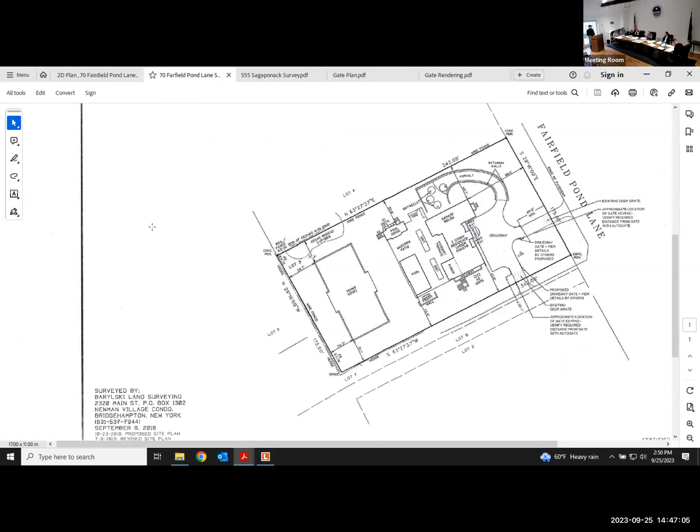So with this design, I just point out to the board that it's not usual that we have a huge solid flat panel near the bottom. And the other thing that is unusual to our normal standards is we would not have a white enamel finish. You may have an earlier submission — we have something with a penned notation that it's white enamel. Okay.

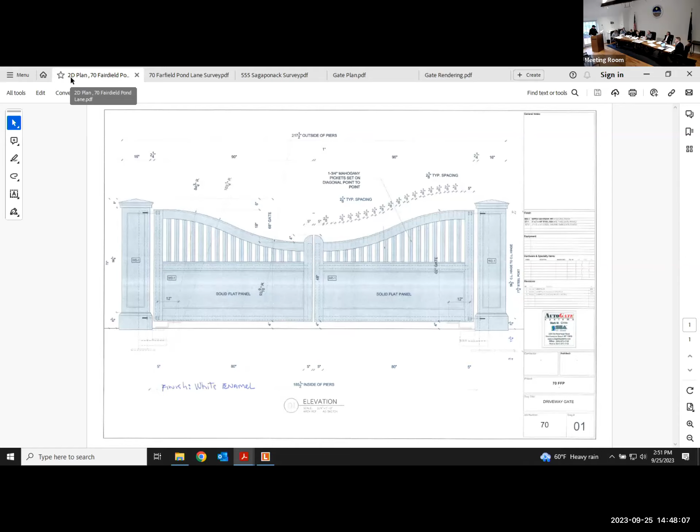Okay, we submitted to the contractor materials that's totally different than what we have. Are we sure we're on the right application? It is, 70 Fairfield? Yes. Okay, because the other applicant had something similar to what you're holding. So this was submitted after reviewing our guidelines? Yeah, no, so this drawing, this elevation sketch, is dated after this one.

This is what the client had first asked us to propose, this is what she had first asked for. Okay, so this is not correct. It is not correct. Okay, very good, let's see what you got. Can you put that up on the screen? We don't know it, you don't have that either. Okay, I have the one you have. Okay, all right, so at present, we don't even have a set of plans for what you have.

What's your suggestion, could we pass that up through, just let the board comment on it? Yeah, okay, that would be great, thank you.

Start your time. The gate would be at the back or inside of the deer grate? Yes, okay, looking at 40 feet from the survey, that's bringing it down. That's mandatory on the front, yes. So the client is asking for relief from the 40-foot setback from the property line, as compared to a 40-foot setback from the edge of the street.

The reason being that this puts the gate somewhere that has no business here. That's for the zoning board of appeals.

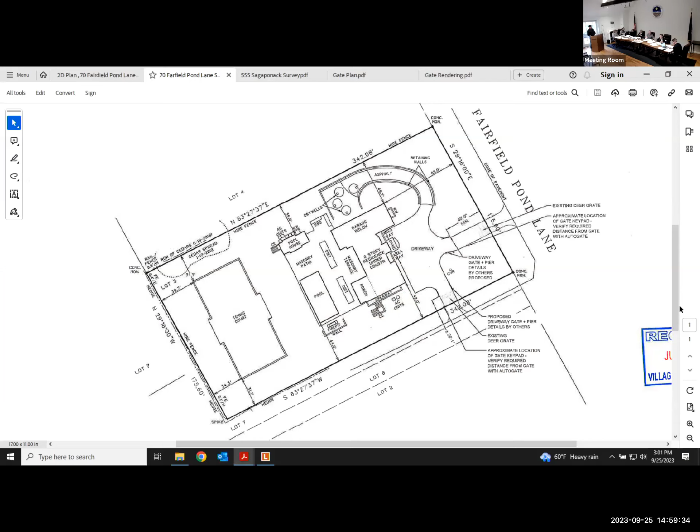However, the gates are opening into her parking area in front of the house. Automatic gates require, to meet UL 325, two types of non-contact safety detectors. So we incorporate a photocell between the gate columns, but then there's a vehicle detector. There are several vehicle detectors and ground loops installed beneath the driveway surface. So the safety loop on the inside of the property and the exit detector are now into the parking area, very close to the front of the house. So it negates parking there because you'll have a gate constantly opening and closing.

So her concern was, can she not have the gate located differently, can the gate not be located even if there was any leeway at all. Normally we tell clients all the time, you want a minimum setback from the edge of the road of 24 feet, but every village has their own specific codes. So this is codified now, right? Your 40-foot setback, if I'm correct? Yes, it is.

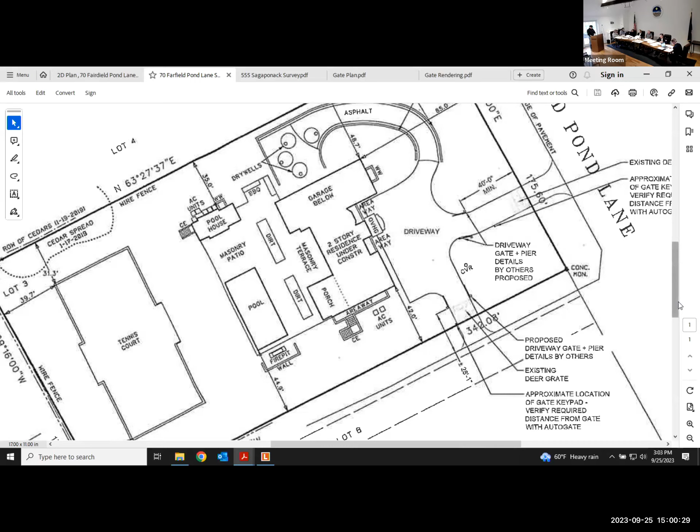So that's part of the Village of Sagaponack's code. Now in her case, it puts that gate 64 feet from the edge of the road. She's concerned that cars will pull up to the property and then have to back down again—whether it's an Amazon delivery or someone who's turned into the wrong driveway—rather than having the gate closer to the road where you can still pull a vehicle off and clear the edge of the road. But that's her concern. That's the full length of a tractor trailer at 64 feet.

But from my perspective as the builder, that puts our safety detectors inside and then the exit vehicle detector beyond that. So the exit detector, even if I had it right up against the safety detector, we're going to be into the parking space. That's all.

But you would still need, from what I understand, a variance from the ZBA if it won't be the 40 feet—unless you just cut off the access completely. It's a no-brainer, just remove it.

Yeah, but well, I don't see us as having particularly—not sure. The way I see it from a procedural standpoint is that if it's a ZBA matter, it's out of our hands. What we're looking at, and what we can look at, is the design of the gate. It depends on whether you want to vote on the design of the gate now and grant it pending a variance, or wait until the applicant comes back with a variance or conforming plan.

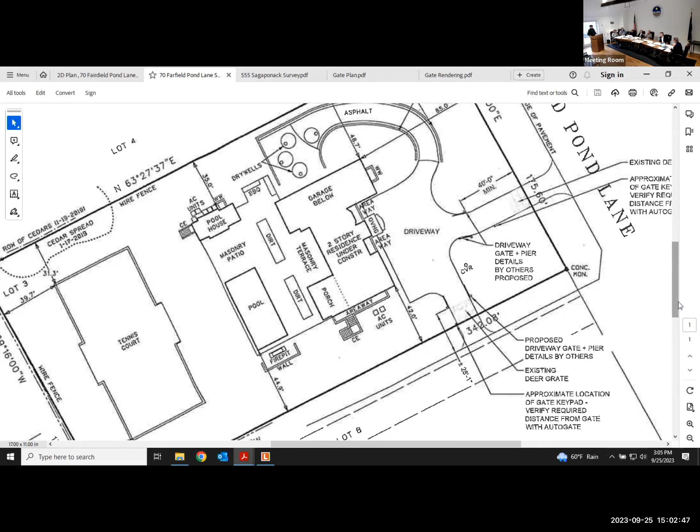Do we have, for the benefit of the applicant, copies of the designs? Have we put those in the code already? So just for the applicant's understanding, the board has issued several guideline images or concepts of what kind of gates we would like to see. We can probably furnish you with a printout. We don't have what you're requesting—I thought there were different kinds of gates, like 5 pictures that we approved, that we could sign off on.

Let's just adjourn this. Yeah, okay. We've all decided we should wait. Let's just wait, and then we can speak in terms of it, and we can get together with that set of photographs.

So at the moment, we'll adjourn this. You can speak to John or to Rhodey about your process for the zoning variance for the placement of the gate, which is a procedural process that you need to go through for your applicant. I would just relay that information back to the client and explain that the code was the code, and that's why we had Barylski incorporate the location of the gate at 40 feet away, as you had requested. Okay, all right, thank you.

Here are the gate pictures in case you're interested. Sure. Maybe the more... all right, looks like... those are just samples, those haven't been approved. They're not approved, but they are more, you know, things like that.

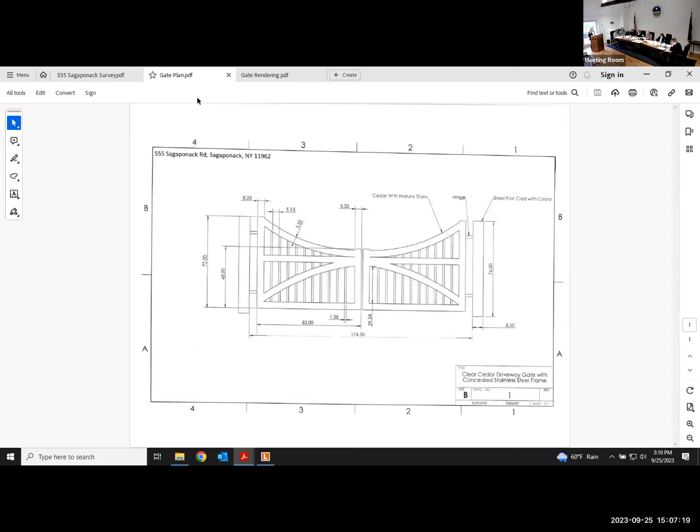Anything to add? Hi, Susanna Herman, consultant for the applicant. The gate would be down a very long common driveway, about 800 feet from the road. I tried to follow the code as far as keeping it more open.

Clear cedar with a natural stain. How far in off the edge of the driveway are you? Off of the property line, it's only about 15 feet. But there's really nobody past you. There's one house, if you look at the survey, there's one driveway that's past this one, which comes in a little bit to the south of where this is located.

So, can you zoom into that? It's plenty of room for a truck or a car to pull off of the common driveway before encountering the gate. And your call box is in a good spot for that.

So the entrance on this survey is in the upper right-hand corner of the lot. If you zoom into just about, no, that's the other side of the street. We're looking at the upper right-hand corner of the parcel. Do you want me to point at it? Sure. So Sagaponack Road is up here, way up there, 800 feet away.

This common driveway goes past what's farm field over here. There's only a couple of houses, and then you pull into this property. This is the entrance, the driveway that comes in like this. You go into the garage here. The entry gate would be up there. Yep, very good.

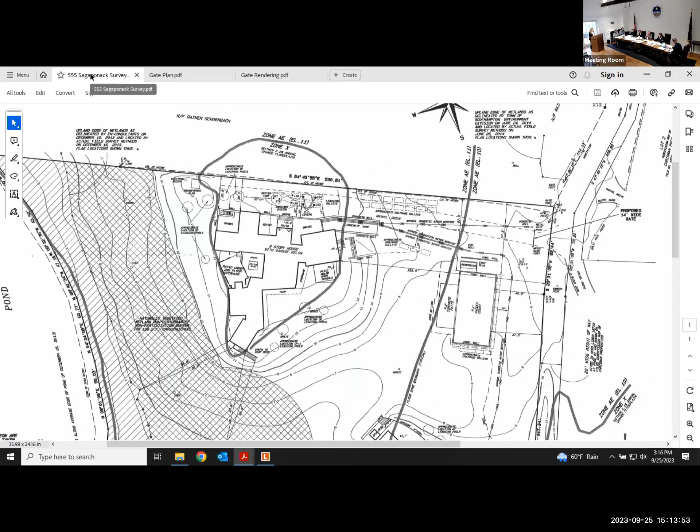I understand what you're saying. I don't think the dogs should be able to get through it. It's just the dog thing, I just can't. I don't think that's gonna be... I don't have any reason to secure it as well.

If you're so far back, like you said yourself, but I don't think there's so much wrong with it. It's like, I don't know, I've heard a thousand gate applications, I just can't handle it anymore. Give me a real reason. Reason, period.

So, looking back at, not to bore you guys yet again, but our criteria is avoidance of excessive ornamentation, concealment from public view, functionality without unnecessary design features, limited structural and visual mass, use of wood, natural and unpainted, visual compatibility with surrounding properties, harmonious relationship with the neighborhood, mitigative impact upon increasing setbacks from required setbacks, placement at greatest reasonable setback from the street, necessity or absence thereof of gate and or gate post for the security of property.

So the code generally allows for gates. These are just criteria we can look to as to their presence or lack thereof in turning them down. And I believe the meeting before last we did grant some gates, and our mitigating factor there was that they were virtually invisible to the naked eye of the public. This one's not. I mean, if you're driving back there, I guess you'll see it.